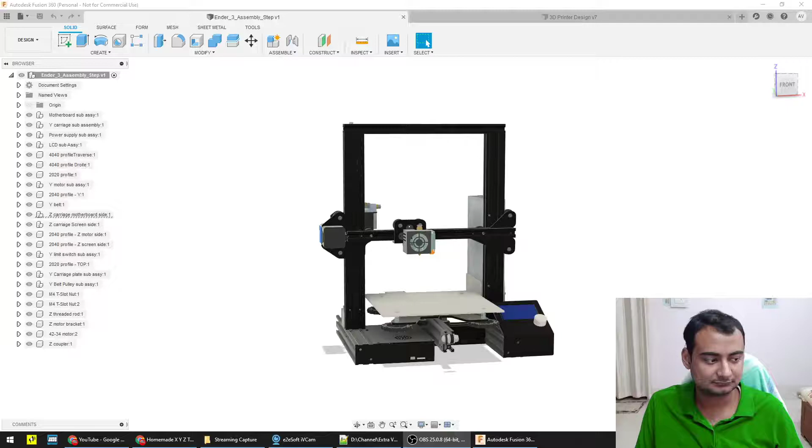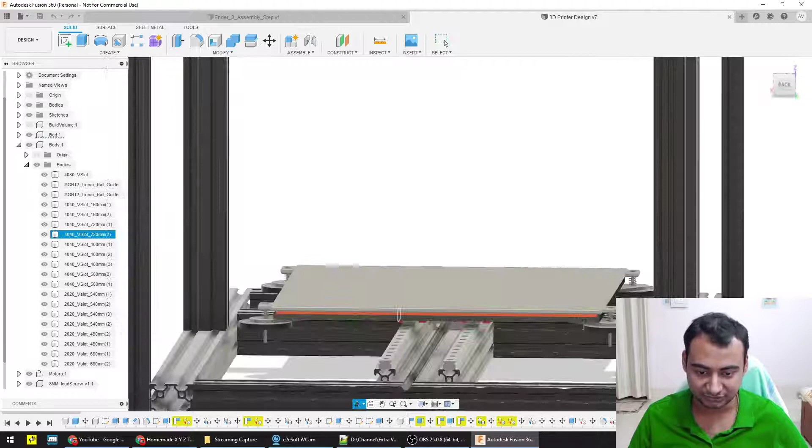And this is basically the build plate volume, and you can see I have the build plate, then I have the silicon heater. It is around a 300 to 400 watt silicon heater. Then there is insulation, then we have the frame, basically the support frame. That support frame bolts onto linear rail blocks, and those blocks ride on these rails.

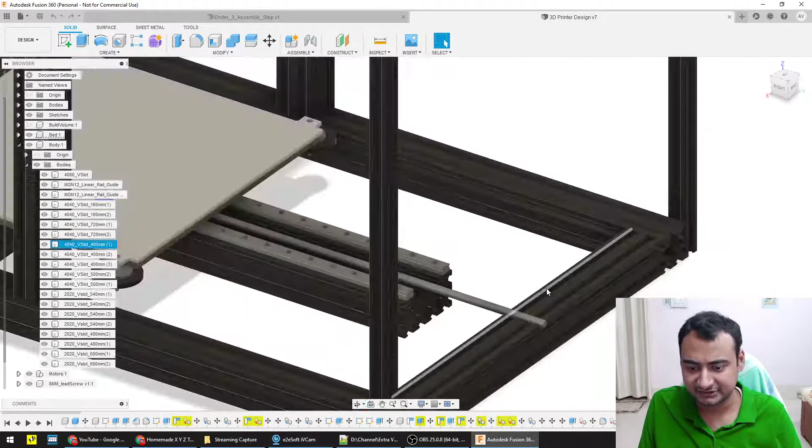And this is the C channel, and do not mind this because again this will be cut. I have not chopped it off yet, so in the real world this will not be happening. So this was just a rough idea of what I want to do, how my final design will look. Now because I'm using a Cartesian style printer rather than CoreXY, the consequence will be it's a bit longer. It will not look as square.

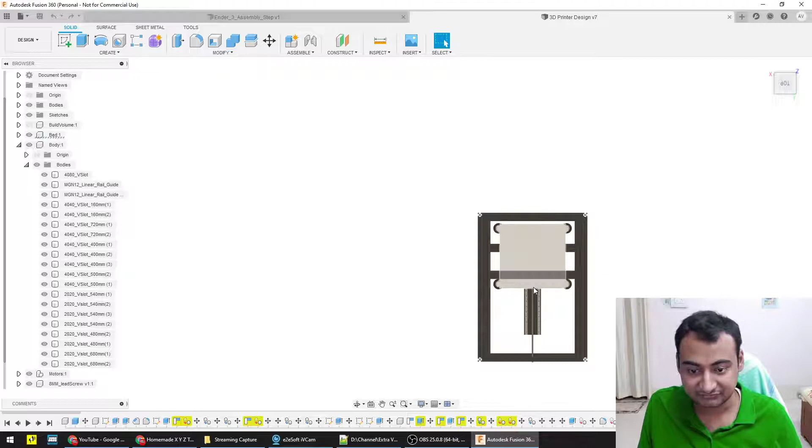Basically if you look from the top, this part has to travel the complete distance of itself. So 300 millimeters in this direction, 300 millimeters in this direction. So basically the print head can easily reach all these areas. Now that's the aim of it. Now this is a rough blocking.

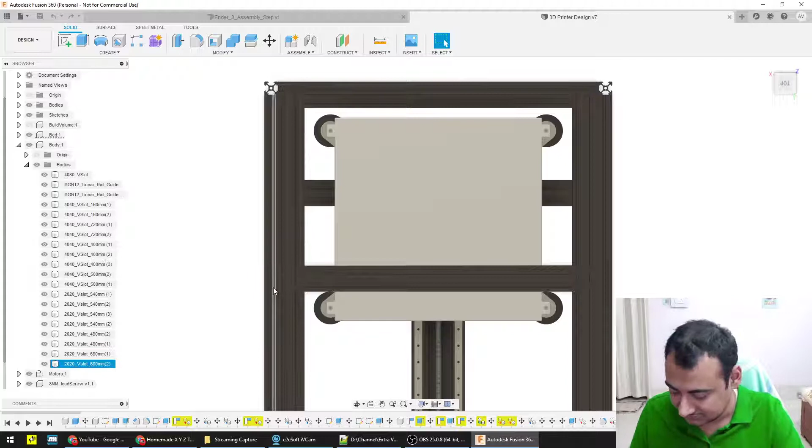Of course I will fine tune it because I already made a mistake in this puppy, because I'm planning to have a dual extruder. This is not wide enough. Basically this area is not wide enough. Motors have to go way too far. Allow me to change to this. As you can see, the motor almost has to come out of this area, but this part is basically the pillar. This pillar will have the linear rails and all that jazz. Oh, I think I have accidentally closed the folder. That's unfortunate.

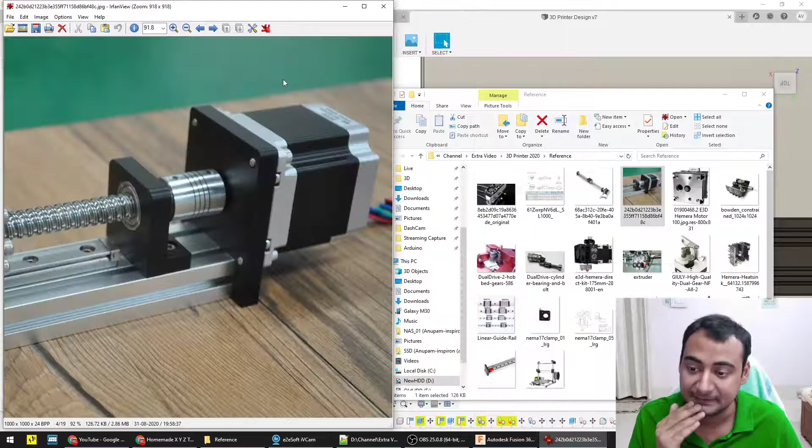But references. You can see what I'm trying to create is something similar to this. Basically, I'm going to have a stepper motor, linear bearing, and threaded rod. Now be mindful, this is a CNC-grade NEMA 23. I'm dealing with NEMA 17 now. That's why this area is not accessible to me, and my core design element is everything has to be enclosed. I cannot have things poking out like this design has.

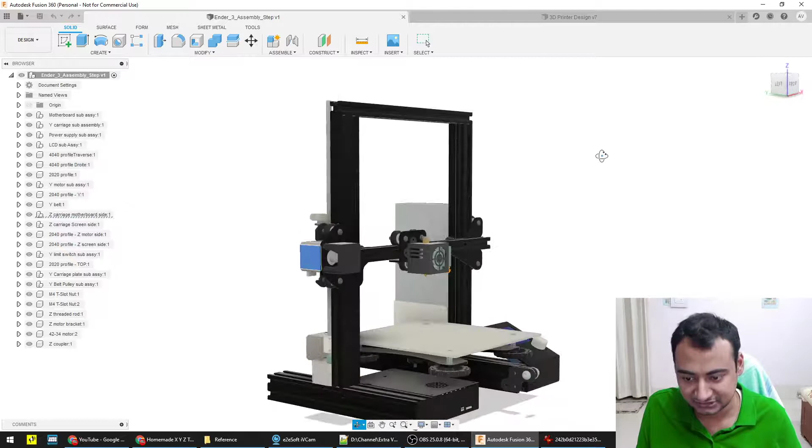As you can see, the build plate ends here, the frame ends here, but somehow this part extends on. There is not going to be any extending, so it has to be inside, and that will allow me to bolt this frame much more rigidly. I have this printer in real life, the Ender 3, so I know for a fact that it's not very rigid. So this puppy is built in such a way that it can be super rigid.

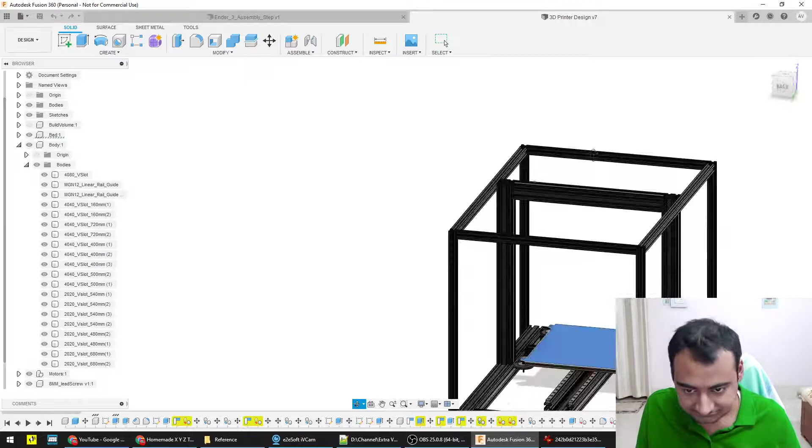Basically, as you can see, I can mount this puppy from here, here, and here. I can mount it from all sides, and on top I'm limited, I can't put anything in this direction simply because there will be a motor and linear bearings, but I can put something in this direction, something from here. Basically I can reinforce the hell out of this puppy to make sure it is absolutely rigid. So it's not just about looking cool, it also makes everything rigid. And if all the joints are properly aligned, you're talking about some seriously tough hardware.

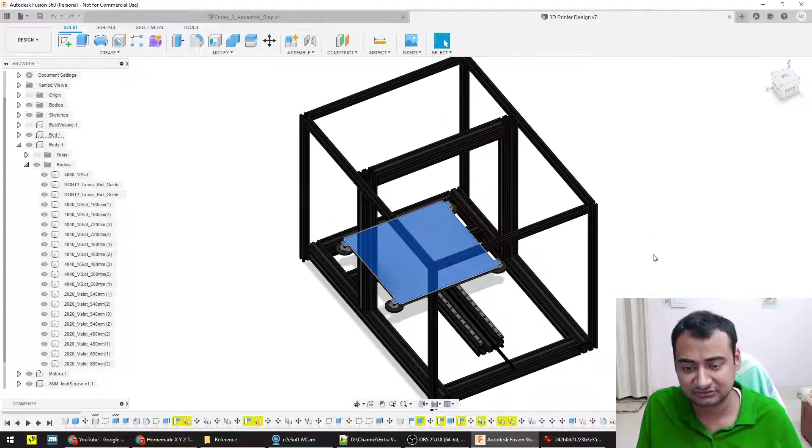And not to mention I want to enclose this puppy in metal, sheet metal. The reason is we are talking about a serious amount of energy being dumped into it, especially with this silicon heater. It's around 300 watts of heating power, plus other things, so it can catch on fire. So you want to make sure the enclosure contains the fire in case it ever catches. Most likely it will never happen.

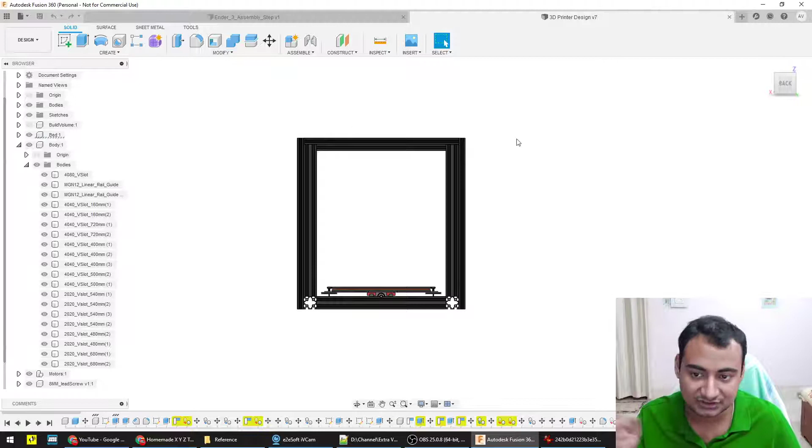And basically all the electronics will be on top, outside of the build chamber. There will be a box kind of structure on top. I have not decided that yet. In that box structure all the electronics will be. So the two Z-axis motors will be coolest because they do not have to be inside the build chamber, so they will not be hot. But the Y-axis motor, the X-axis motor, and the extruder motors will suffer. So that's the whole point.

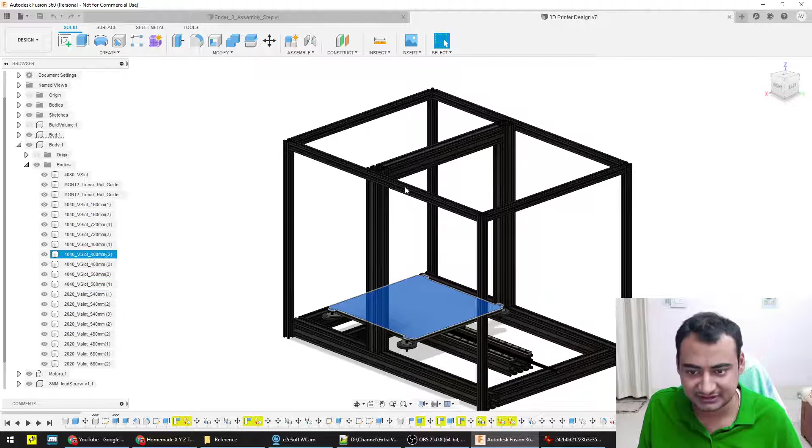So I will just fine tune this design, hopefully have some joining blocks done today, and then my main goal will be to start designing an extruder. That's the main puppy. As you can see, I'm aiming for something like this, basically a dual extruder design. But be mindful, I'm not going for Bowden tube. I hate the Bowden tube idea, not to mention they are not very good for flexible filaments, and they always have a bit of slop. I don't want a sloppy design, so I'm going for direct drive.

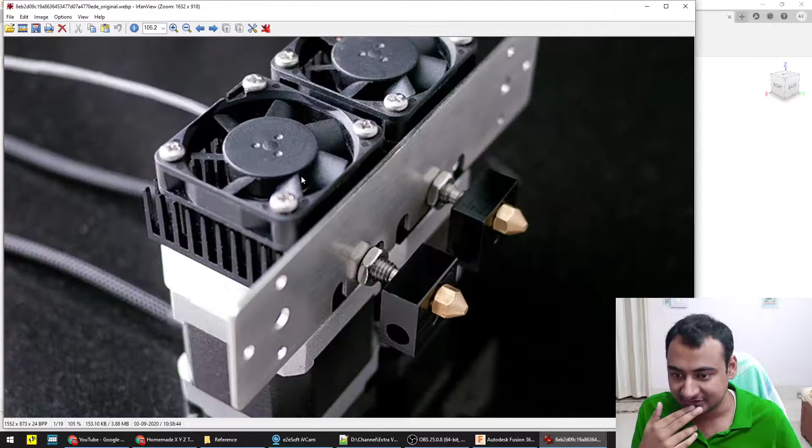And this is generally done for direct drive, but you can notice this is what we call a single system. Basically you have your stuff coming down here, and then there is generally a cooling block also attached here. They have opened it so you can see the mechanism, and this is the heater block. Now this will be the core of my design, but you can notice this is direct drive. Basically you have filament here and a stepper motor is driving that.

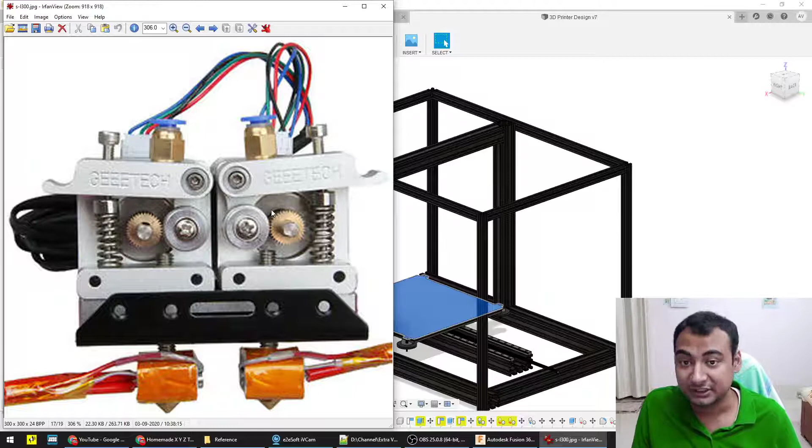Consequence of that, stepper motors, NEMA 17s, they are not that powerful. Even the big ones, they are not that powerful. And filament, they are notorious for, if this puppy clogs up, basically the nozzle clogs up, the energy required of this motor would be too damn high, and it will skip steps, which happens. You will hear like kit kit kit kit, steps skipping will happen. And if the spool tangles, which is a common issue with me, the spool always ends up getting tangled. So at that point it will not be able to pull through, so it will destroy your print.

So is there a solution to that? Yes. If I can just scroll to that, now this is the solution. This is the most advanced system you can do for basically 3D printer design. This is what we call stepped geared dual drive. So like what the hell does that mean? First you can see there is a step down. So this is a stepper motor shaft, and this is a driven gear.

So the benefit of that would be, let's say 2 to 1. Basically you're gonna reduce your RPM, but you're gonna improve your torque, which is more necessary for filament extrusion. You need more oomph. So this takes care of that oomph part, so you do not have to be like, okay, it's barely skipping steps. So that removes that problem.

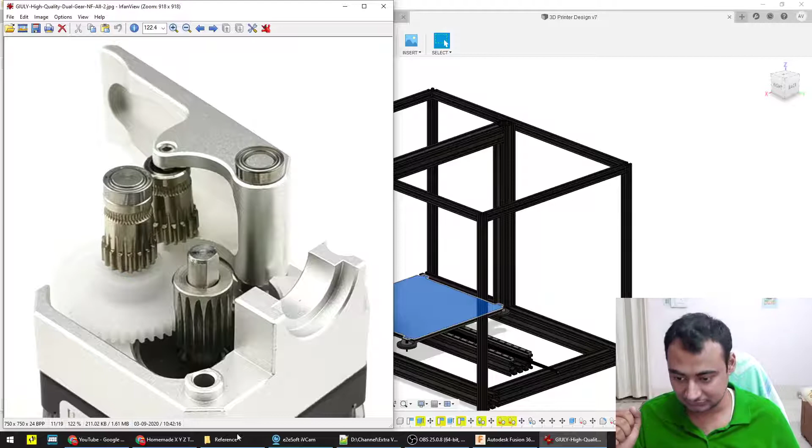Another aspect you can notice, this has dual teeth. Why is it there? Well, hold on, if I open the normal one, you can see there is teeth on one side. So filament is gripped on one side, but the other side is completely smooth. What will happen if you are putting too much pressure on the filament? Consequence of that would be the teeth will dig in, but because this side is smooth, they will strip it, like you're gonna basically grind it away, and that does happen. Shavings, and this will clog up.

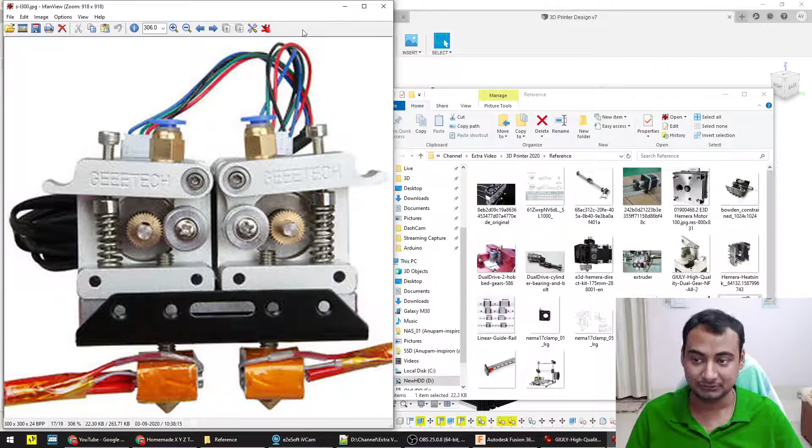So this is good enough, like it does work, that's the reality of it, but it's not very reliable. Basically you cannot close your eyes and count on it working 100% of the time. So people go with dual drive. That way, because it's driven from both sides, the stripping probability is gone, and it has to be geared. It cannot be just free floating, because the same thing will happen with the bearings. So this is the best system you're gonna have. Now Hemera basically is the most advanced system right now, and it does all of that in one very small compact block. So it's quite amazing.

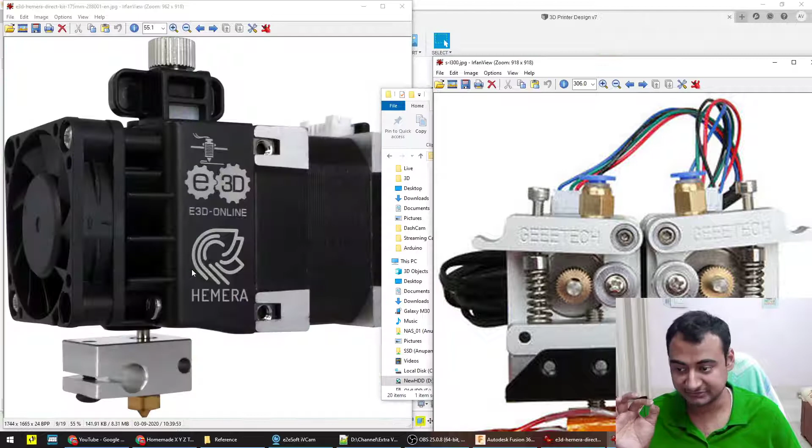This Hemera system is quite amazing, but I do not like the design of it simply because the heat sink and heater are on one side. I cannot basically make these two like this. I have to make them like that. Consequence of that, the nozzle, the actual 3D printing part, is very far away. You want it to be as close to the frame as possible, so it has less oscillation. Basically, if you are making something that sticks out like this, it has a lot of oscillation. So you want this puppy as close to the frame as possible.

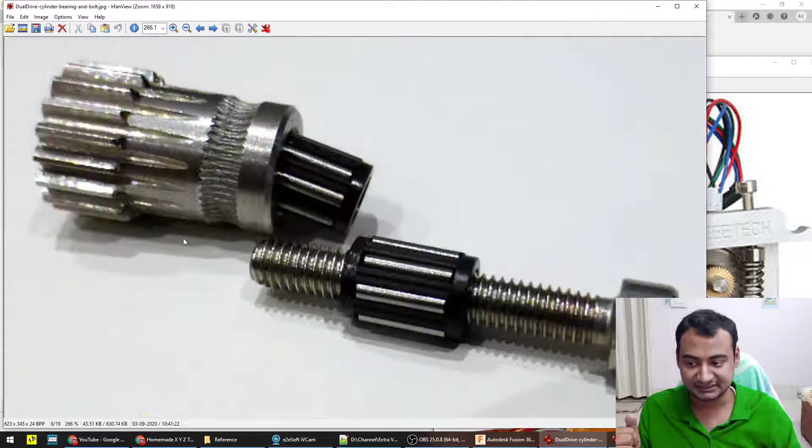Now again, if you have a single print head, Hemera is the best there is. But if I want dual, this design is not suited. It's not that it's worse or unusable, but it's okay. And you can see Hemera, they have learned a lot. So they have even metal gears, which is necessary. If I ever want to print ABS, the chamber temperature will go hot enough that if this was printed in PLA, it will warp. There is a risk that it might strip apart.

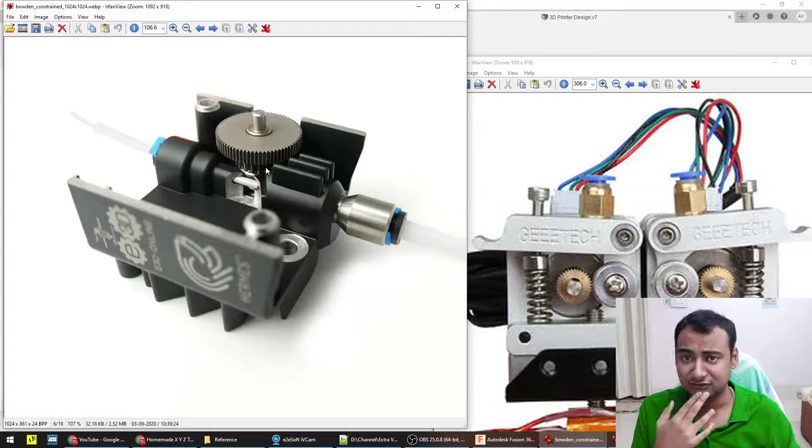So again, this is the part that I have to figure out, how I'm gonna get these sorts of gears. These are very small, and I've not even seen any bearings that are that small. So it's gonna be a difficult problem. Like these needle bearings, I have no idea what they are called. So this is going to be a big tough challenge, but at least I want to figure out the designing phase. This project is much bigger than I anticipated, and I'm happy and sad for it. Happy that I'm learning things, sad because I do not think I can finish it this week. So this will become a secondary part, and my main channel is stopped because of this.

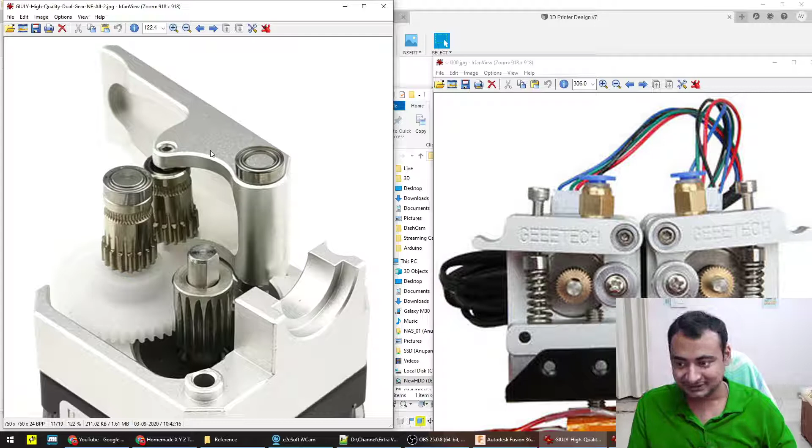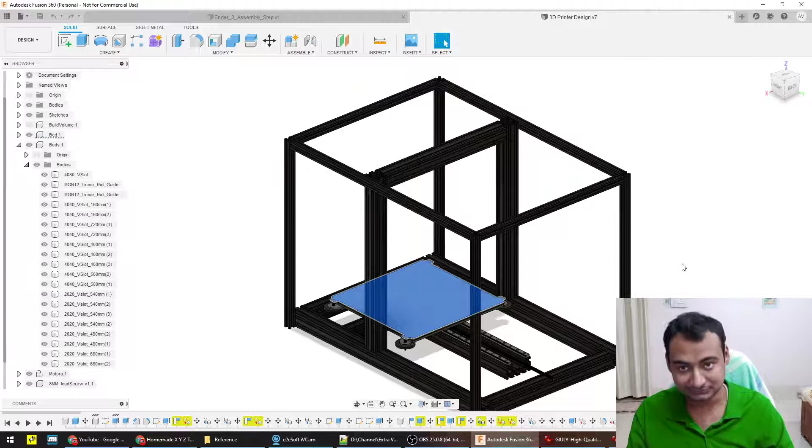So big things, small packages. I hope you like this update and at least see some behind the scenes. I'm trying to record every step that I'm building, so at the end of it I could have a complete time lapse. And you're seeing day by day updates, how little progress I have made. It's not like tada, there is a 3D printer. It takes time to design it. And if any of you are actual CAD engineers, you're like, bro, give me 5 minutes, I'm done. I know I'm an idiot. So that's why slow builds happen.